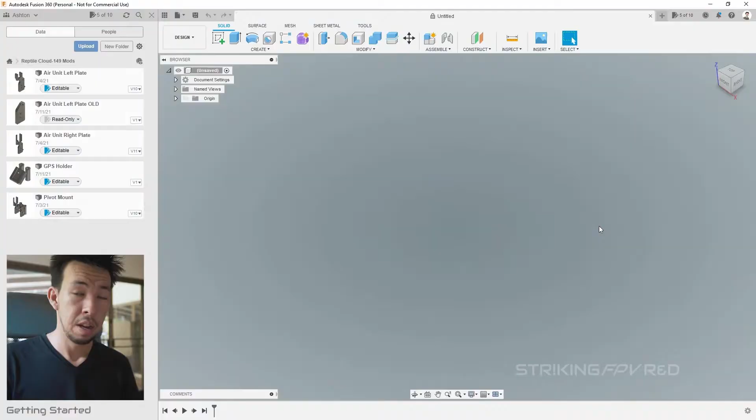All right, so you got to start up Fusion 360 first. Fusion 360 is free, and I'm not teaching you how to install it because it's pretty self-explanatory. But you do have to sign up, click a couple of boxes, and once you're ready to go, you'll be presented with this screen.

Untitled document. So first things first, we need to create a sketch by clicking this button on the top left. A sketch is basically a 2D drawing that we're going to use to end up with a 3D object.

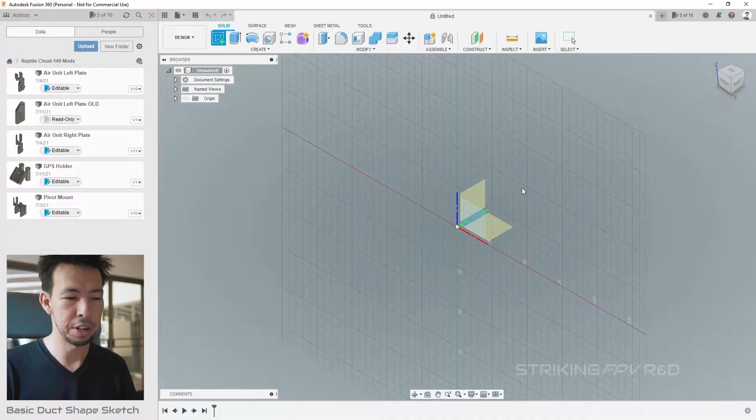First things first, I need to choose a plane, and I'm not going to choose the top-down plane because despite this being a circular shape, and you're thinking maybe I want to draw a circular shape like that, we're not going to do that. We're actually going to draw the cross-section of the shape. So we're going to select this side plane, could be the other side plane, as long as it's not the top-down one. And we're presented with this grid.

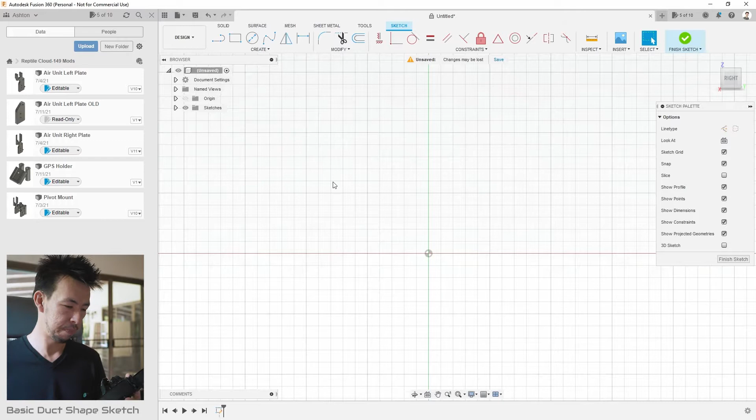So first things first, how big do I want the duct to be? What I'll do is take the original Cloud-149 drone, 149 HD in this case, and using a pair of calipers, we're going to measure the diameter. And that is almost exactly 80 millimeters across.

But I know that's a little bit too much. If you look, there's a little bit of extra gap around the props, and if you want really good efficiency, you want that gap to be smaller. So if I quickly measure that gap, just eyeballing it, it is actually about 3 millimeters.

Spoiler alert, I've actually done this before. I've made a duct before, and the amount that I actually quite enjoyed using was 78 millimeters for these props. You could go smaller if you had slightly smaller props, but that's completely up to you and part of the prototyping process. So if 78 millimeters is the diameter, I actually need to work with the radius, which is going to be 39 millimeters.

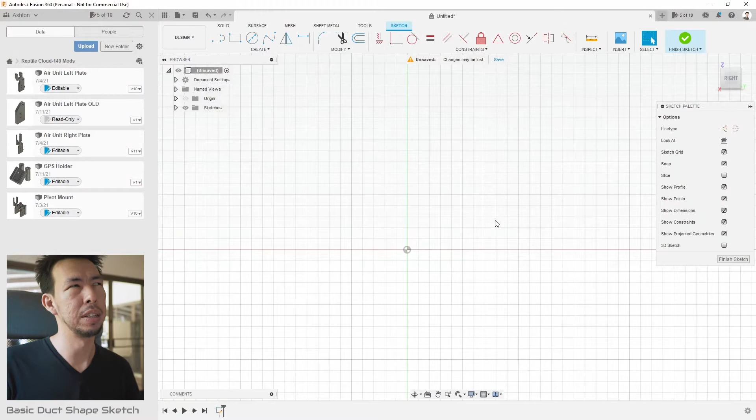So click on here, this is the line tool. It's how you draw lines. You'll notice a pop-up appears. All of the tools up here have a little pop-up which explains roughly what they do. Very handy. Once we click that, I'm going to click on the center of our sketch.

You'll notice if I move my mouse around, it's showing a preview of the line, including two things I can fill in. The first text box will define the length of the line, and if I press tab, I can also select the angle the line is from the horizontal plane. In my case, I want to set the length, so I'm going to move the mouse here where it locks to a horizontal plane, type 39, press enter, and now I have the line at exactly 39 millimeters long from the origin.

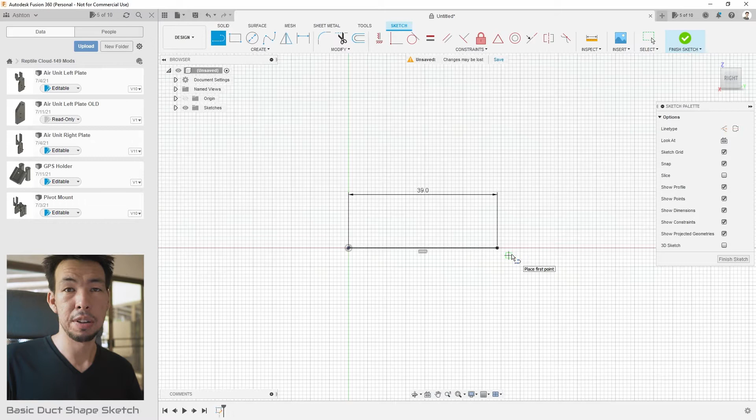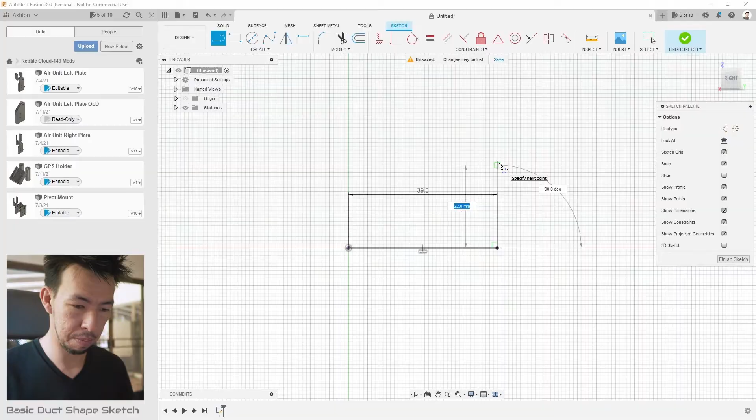From that point, I'm then going to draw the rough cross-section of the duct that we want to create. So I'm going to click here, move the mouse up, and now I need to know how tall the duct is. To save time, this is another duct that I made. I'm going to measure roughly with this, almost exactly 30 millimeters. So we're going to type in 30, press enter, there we go.

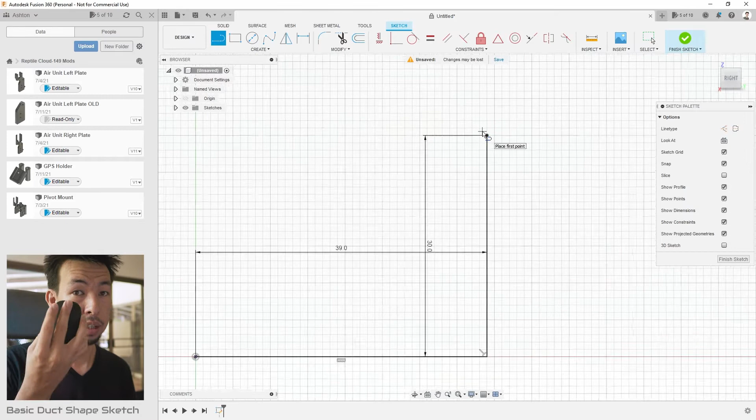Now in terms of thickness, the original duct is just shy of 2 millimeters thick. I've actually made mine also 2 millimeters thick, so we're going to type in 2 when we create this section here. I'm going to zoom in a bit, use the scroll wheel on the mouse to zoom, click on that point, draw across, and just type in 2. Then we're going to complete the shape by drawing down. You'll notice it's still doing the line thing, so I'm going to click across. And there we go.

We're pretty much done. Now the other thing is we have the original line that we used to set the initial distance. I'm going to just click on that and press delete, and now we're left with our main cross section. So just to demonstrate, we click Finish Sketch. I can then use the View Cube to go back to a kind of 3D view.

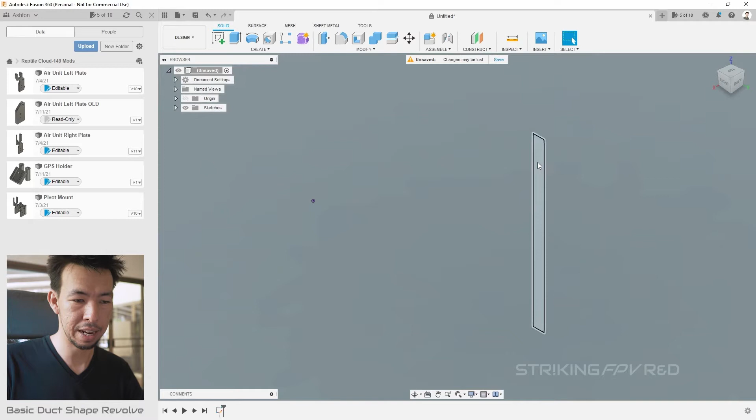I like to use this top kind of oblique angle. Zoom out a bit, and with this sketch selected, like so, I then click on Revolve. What Revolve is going to do is sweep around and create the cross-section around an axis, which I now need to select. In this case, the vertical one, the blue one. So we click, and boom.

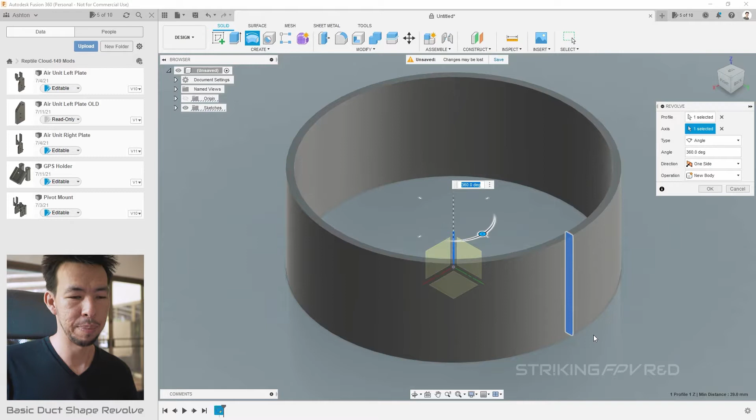Now you see how this tool happens to work. It's created - I'm going to click OK - it's created a revolution of our cross-section and generated this, what actually looks a bit like a brass sleeve. But this is not really a duct shape.

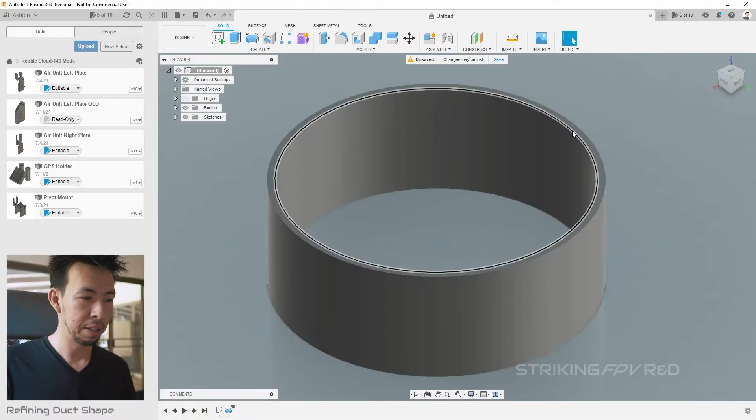So what we're going to do is go back into the original sketch and modify it. That's the brilliant thing about parametric design and software like this - you can go to a previous step, change it, and alter the outcome of the final piece. So to do that, we go to this little timeline on the bottom, and I double click on the sketch, and it brings me back to the sketch.

So what we need to do is now create a rough duct kind of shape. Now, with the knowledge that I plan to print this upside down, you'll know if you have any experience in 3D printing that 45-degree angles are roughly the limit you want for overhangs when it prints off the bed. So I'm going to use that as a guide for creating this particular duct.

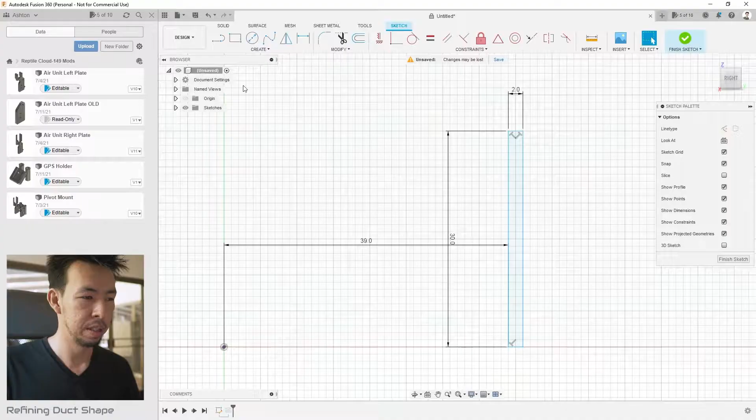So let's use the line tool, and I'm going to zoom in over here, click on the top right edge - it's not locking, which is a bit annoying. There we go, now it is. And there we go, so that's the first kind of edge. Now I want to have a lip, so I'm going to click there. Again, let's type in 2, so 2 millimeters out, and then we'll have the rest of the lip also kind of 45-degree thing going on. Click, and then back to the main part.

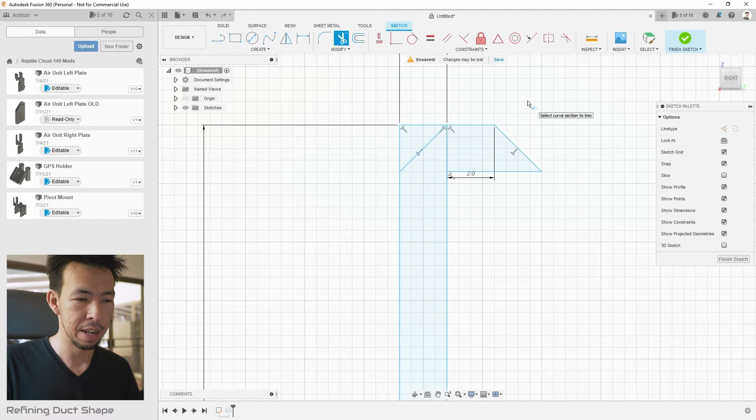Now here's the weird thing. I have this long line here where I don't want this section, and I have this long line here where I don't want that section, nor this one. There's a handy tool for that, called the trim tool up over here - it looks like a pair of scissors. With this tool, it will know where any lines have intersected and give you the option of trimming those lines. So by clicking on these areas, I get to remove those lines.

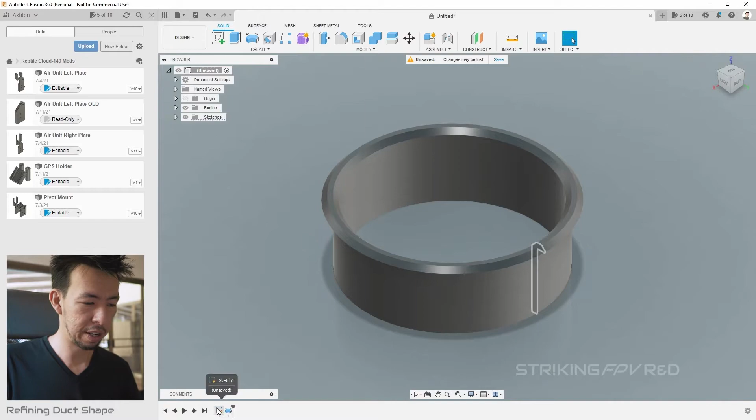If I click Finish Sketch, now our duct - let's go look at a 3D view - looks a lot more like a duct. To further refine this, I'm going to go back in, and there's another thing we can do.

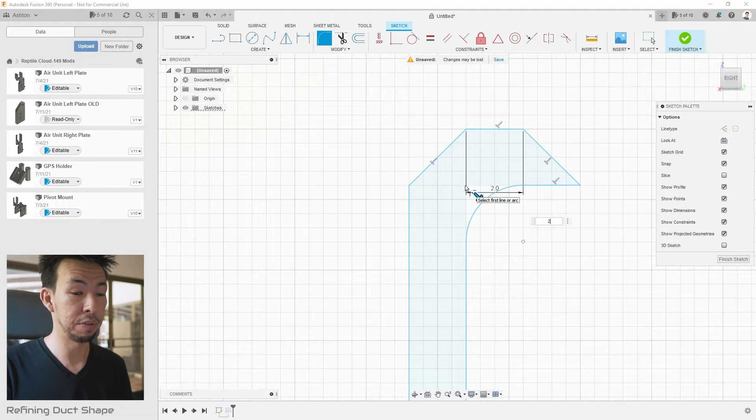So I don't really like this sharp edge over here, but knowing what I know about overhangs, I can actually make this smoother. Using this tool here, the Fillet tool, I can click on that corner, leave it at 1, or I could make it much larger, make it 2. Maybe that's better for strength, so let's do that, 2. And now we've made this nice and smooth curve.

And again, with the overhangs, I can't really do that with this corner because that's going to cause issues with the print, nor with this one, but I can do it with this. So I'm going to click that, and it's automatically selected 0.5. I wanted a bit more than that - let's try 5. Oh, maybe too much. Or maybe too little - 2.5 then. Actually, now let's just go with 2. Press OK, or press Enter, sorry.

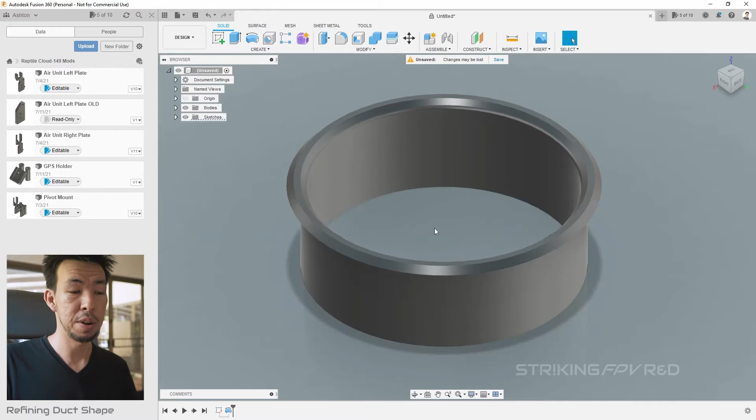And now our duct has an even smoother shape. Once we click Finish Sketch, now it's looking even more like a vaguely aerodynamic duct kind of shape. So there we go, that's our basic duct design.

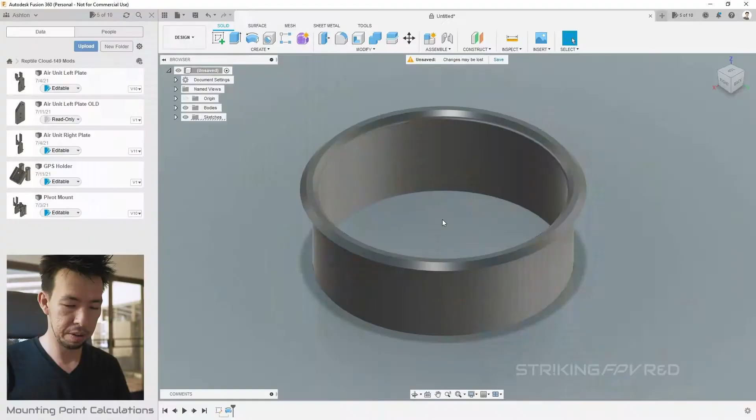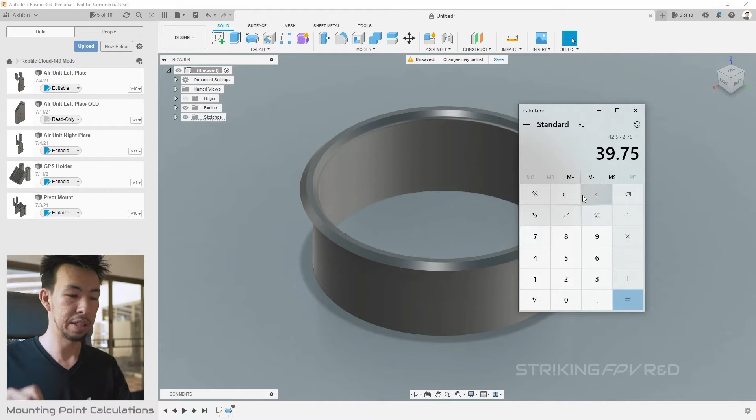43.5, let's go to our calculator. We need to remove the radii of the other holes we just measured. So 43.5 minus, the small one was 2 millimeters diameter, which means minus 1 millimeter. And the larger one was 5.5, and half of that is 2.75, so minus 2.75. That gives 39.75. So now we know that the center to center distance between the motor hole and the outside mounting hole is 39.75. With this, we'll now be able to create the mounting points in Fusion 360.

Back in Fusion 360, what I'm going to do is click over here. There's a little eye next to the bodies folder. Bodies are the objects that we end up creating, and I don't need to see this at the moment, so I'm going to click on the eye and hide it. Now if I click off, you'll notice it's completely disappeared.

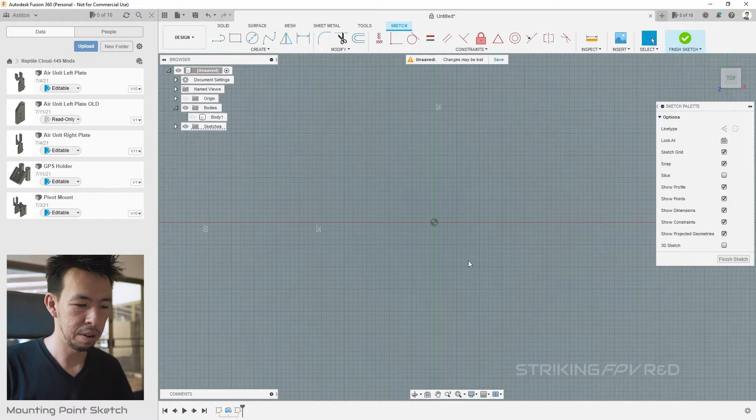Then we're going to create a new sketch, and this time we'll be creating the sketch on the ground plane, the flat plane. So here we are again, but this time we're looking top down. So what did I say earlier? 39.75. A couple ways we can approach this. I could just create a circle to begin with, and it's asking me for a diameter.

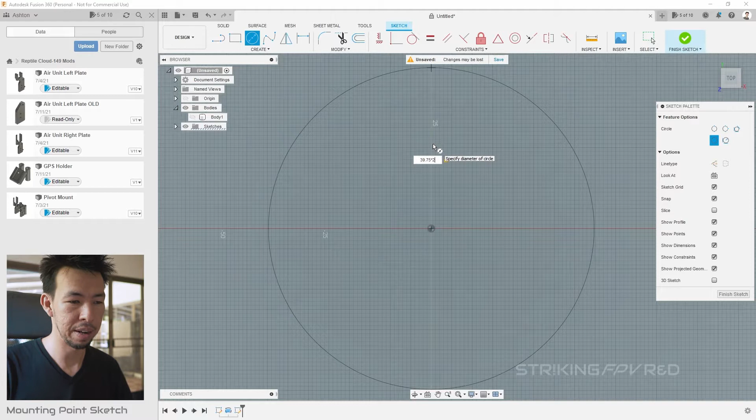39.75 is the radius, but I need diameter, so simply multiply by 2. I can type multiplied by 2, that's the asterisk on the numpad, and it will do that calculation for me. You can do this in Fusion 360 — type a small formula into a length or angle text box, and it will calculate it for you so you don't have to think too much. So 79.5 is the diameter.

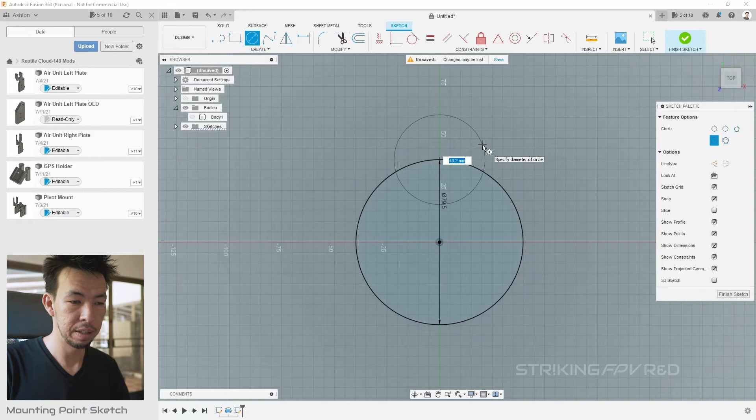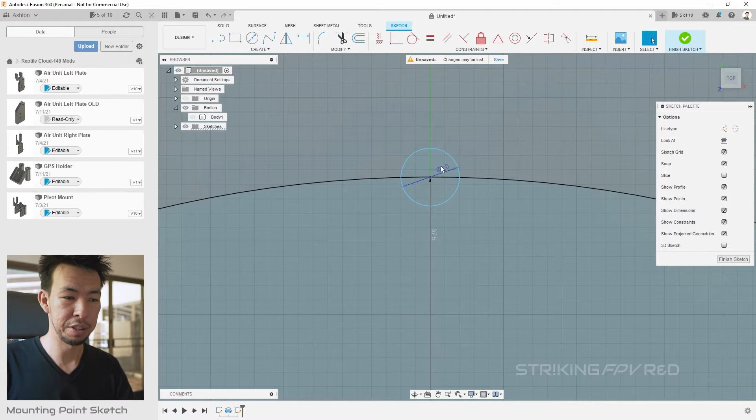Now we're going to place our top mounting hole. All you have to do is move the mouse up there, and it should snap. I can freehand set the size of it, or type in 2, because that's the diameter of the mounting hole. Except I need the screw to bite into the plastic, since I don't have brass standoffs, so I need this to be a little smaller so the screw can bite into it. Now that we have a dimension shown here, this little 2, I can double click it and modify the dimension afterwards. So we're going to set it to 1.7, which makes it just a little bit smaller, and should give enough meat for the screw to bite into and hold the part.

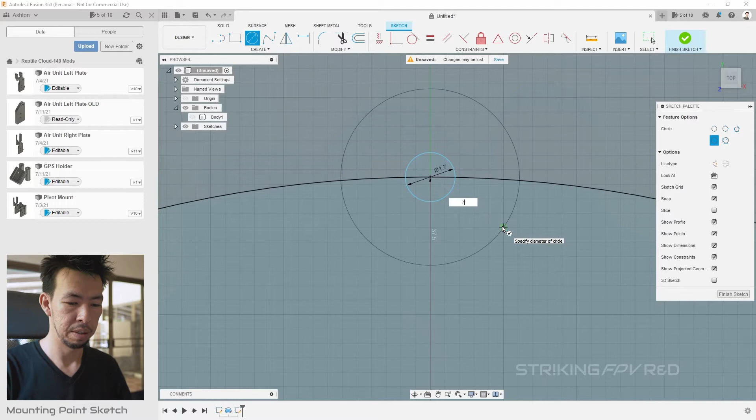Now the second aspect is, what about the outside? Using the calipers, I'll measure the approximate thickness of the arm itself, which is 7, and I think that's probably going to be an appropriate size for the standoff. So I'm going to click on the circle tool again, click on the center of that, and just type 7. And there we have our standoff. But that's only the single one.

What about the other side? Well, we'll work this out. When I say clever assumptions earlier, I mean we can fairly assume that whoever designed this duct has made these equal. They're basically symmetrical along this line, so it's going to be a certain distance one way, and the same distance the other way.

So all I need to do is measure the center-to-center distance between these two holes. Now these two holes are the same size, also 2 millimeter. So the measurement is 17 minus the 2 radii of the holes, which is -2, meaning the center-to-center distance is 15.

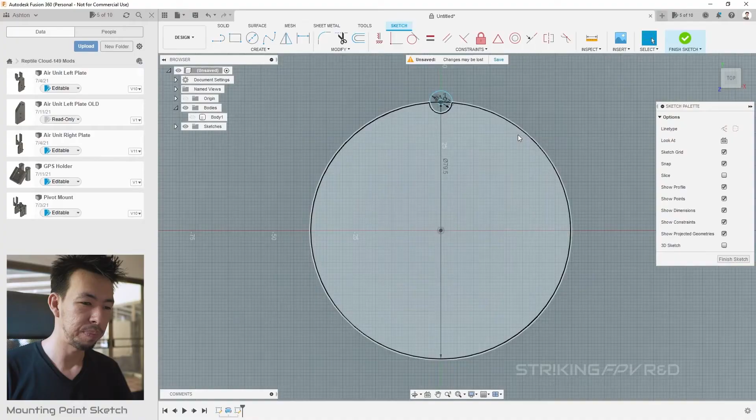With that knowledge, I'm going to create this anywhere. You'll notice that when I'm about to create a circle or draw a line, the snap function allows me to follow the exact circumference of this circle, so I'm not going to be particularly careful about how I do this.

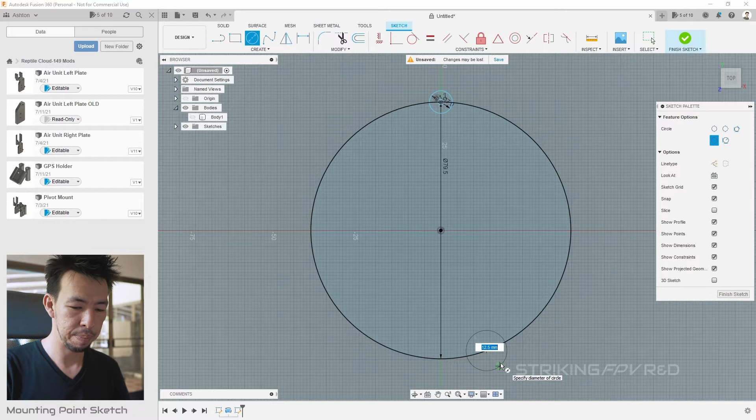I'm just going to choose somewhere roughly, type in 1.7 for the actual bolt hole, screw hole, and drawing again I'm going to type in 7, and we're going to do the exact same thing on the opposite side. Just to prove a point, I'm going to draw that way out of place, 1.7, and make one more that is 7.

Now we're going to use the dimension tool to actually set where they're going to be. This allows us to add dimensions, lengths and distances between objects in order to constrain them in that kind of way.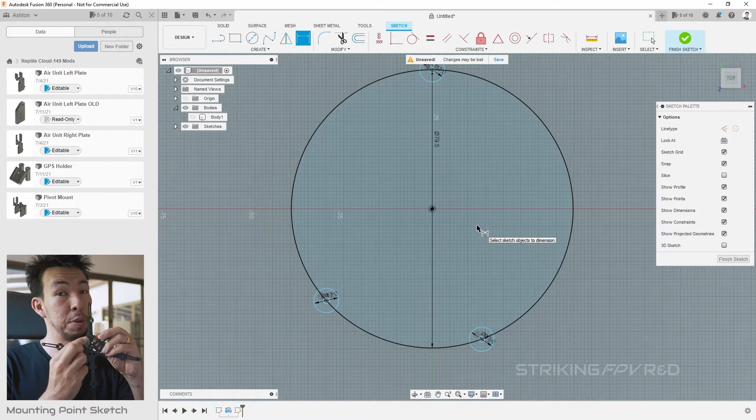For example, I now know that these two holes are supposed to be 15 millimeters apart, center to center. So what I'm going to do is click on one of them and then click on the other, and it's going to bring up this little weird behaving ruler thing.

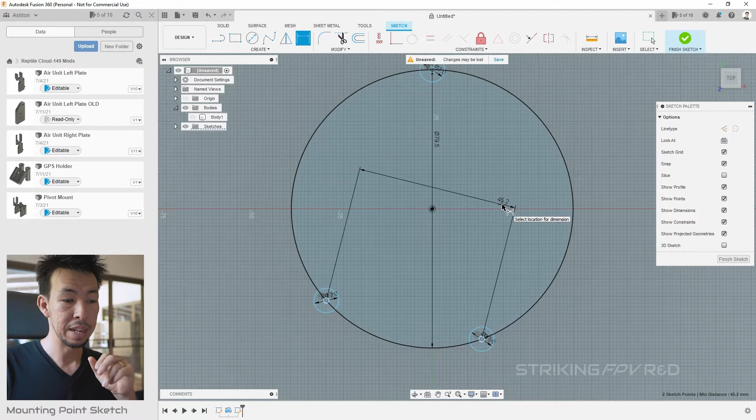If I set it like this, it's going to make sure they're 15 millimeters apart horizontally. If I set it like this, it's going to be straight line distance, the shortest distance. And if I set it like this, it's going to be vertically. In my case it doesn't matter too much, but I'll demonstrate and set this to direct straight line distance, type in 15, and they suddenly pull themselves together, but they're both still on the circumference of our circle.

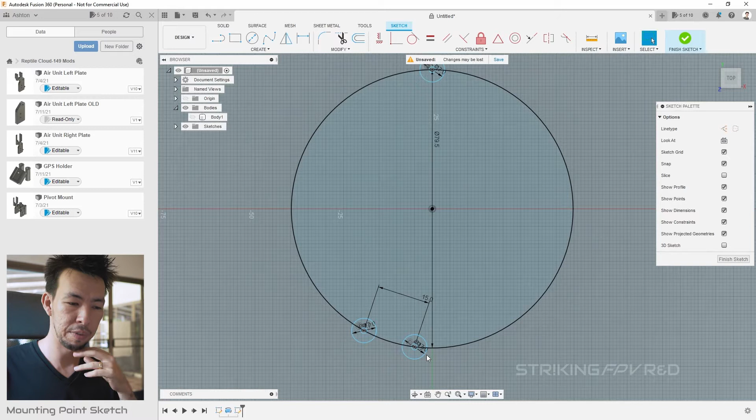In fact, if I drag one of them, you'll notice that they're both staying on the circle and staying 15 millimeters apart, which is really cool. But how do I get them centered?

Even simpler. All I have to do is click dimension, select one, and then select the center of the sketch, because that's the middle. Once again, if I move it here it's the straight line distance, but if I move it up there I set the horizontal distance, and here I can set it to 7.5. And that sets the correct position.

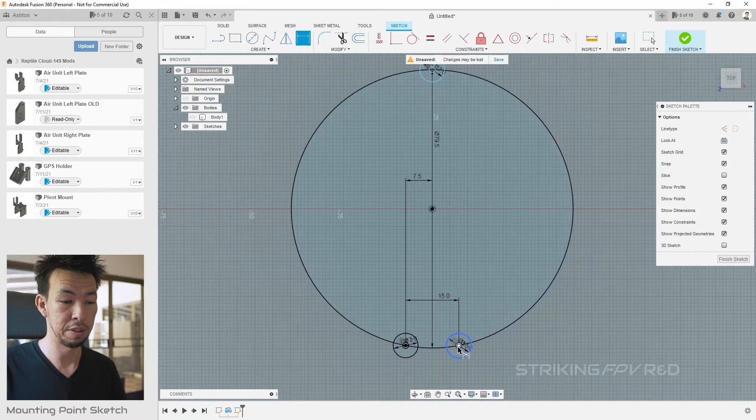Or we can undo that, and just to demonstrate one more time, I click here, click there again, and unless my mathematics is really bad, 15 divided by 2 is also 7.5. Now they're both the correct distance and the correct position.

Anyway, there you have it. So now the only thing left to do is to get rid of the main circle, just by clicking and deleting it. Now we're left with our standoff. So let's finish the sketch, and we're left with the standoffs here.

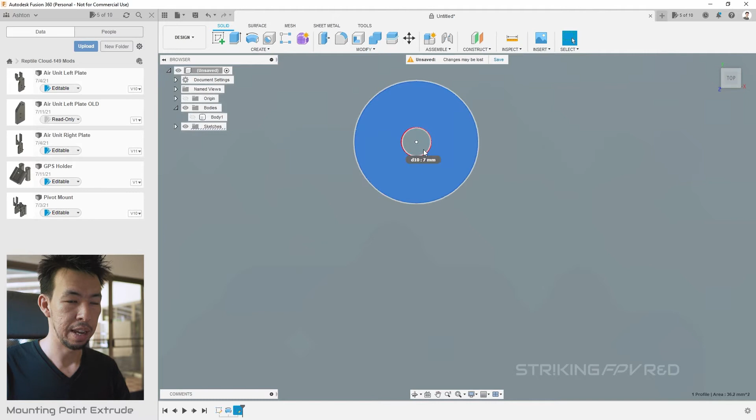Before we actually introduce the main body back, I'm going to use this opportunity to select both the inside and the outside, and there's a reason why I'm doing this - I'll show you this later. Sometimes it's a bit finicky to select them, for some reason I'm not sure. If you know the reason, because you're a professional Fusion 360 user, please let me know.

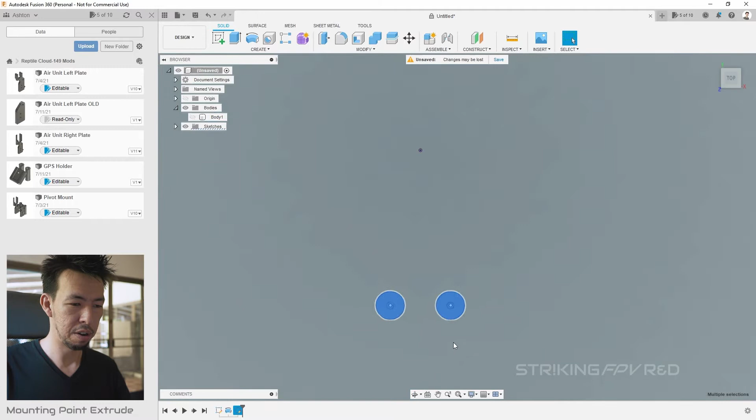Once you've got all of them selected, we can go to one of our fancy oblique views here. Before we do anything, I'm going to unhide the main body, like so, which shows this, and we're going to press Extrude. This is where the magic happens, because Extrude is a function used probably a lot more commonly than Revolve, at least in my experience.

What we can do is drag the arrow up, and oh, it's done a red thing. If I drag it down, it's creating.

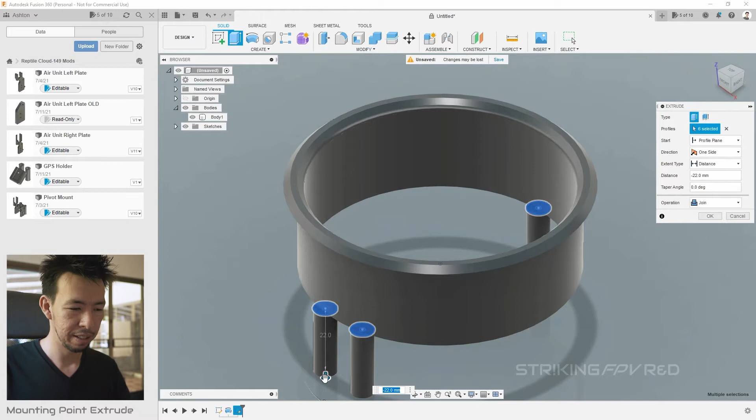If I drag it up, it's deleting, which is not the behavior we want. But that's easily changed, because in this little extrude window on the side, there's an operation drop-down box, currently set to cut, and it automatically changes. If I drag it down, it says join. I drag it up, it says cut. But if I select it, I can set it myself to join.

Now we've got roughly the design we want. Only thing left to do is decide the height, and the way we can do that is either measure one that I did earlier and find out that it's 10 - it's quite tall. What about the original? If I use this, I can measure the original design's height, and their standoffs are 8. I kind of like that, so let's go with 8.

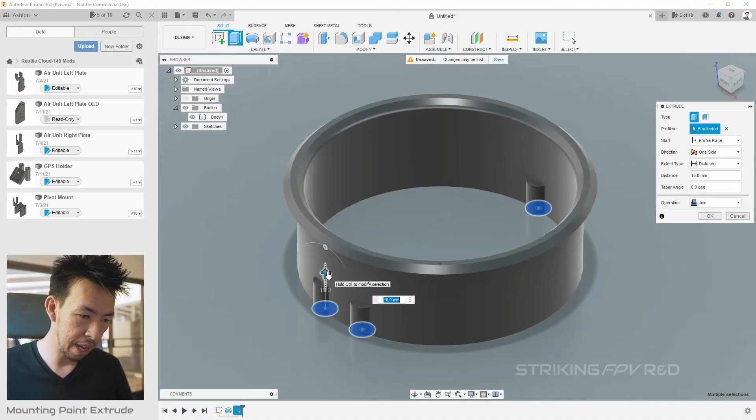I'm going to type 8 in this box there. That sets it to 8. Press enter, and now we've got our standoffs.

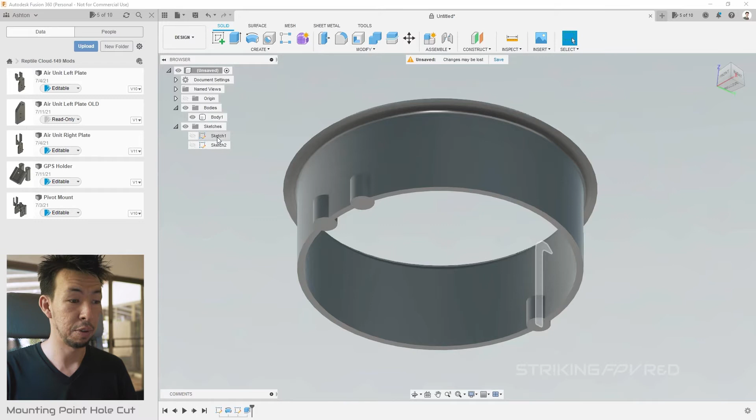The only thing left to do is make the actual holes. So let's go down to this view. Now you'll notice that the sketch we had earlier with the holes is now gone. But it's not, because if you go to the sketches folder here, we have sketch 1 and sketch 2. If we mouse over them, it'll show you what they look like. I'm going to click the now faint eyeball, and that's going to reveal it again.

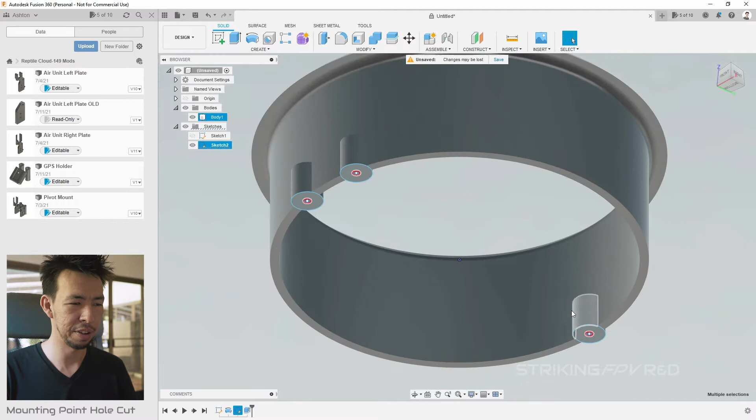Now I'll be able to zoom in, select that hole, select it over there as well. You hold shift, by the way, to select multiple things, if I didn't mention that earlier. Then you press extrude, and it's remembered the last time we did an extrusion at a distance of 8, but it's also setting it to cut again, which is fine.

Now, how deep do we want these holes? The screw itself is not very big, actually. Using the calipers to roughly eyeball it, it's just shy of 6 millimeters. The base plate that it's going through is 3, so the screw is only going to go up into the plastic by about 3 millimeters. But just to be safe, because 3D printers tend to over-extrude a little if you want better adhesion, we're going to set that hole depth to 4.

Click OK. I can now hide the sketch that we just unhid, and we've got our holes. Now, for all intents and purposes, this is our finished duct.

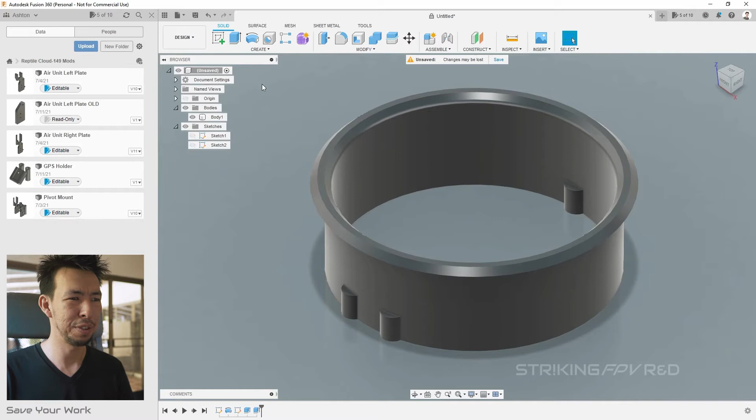So while we're here, Control S, Command S if they have Fusion 360 on Macs, I'm not sure, or click the floppy disk and choose a location. I already have quite a few folders available. I'm going to put this in the Cloud-149 mods folder and name it Full Duct. Press Save, and now we have Full Duct version 1.

So now this is kind of our finished duct. I could just right click, Save as Mesh, select STL, click OK, and have the final design ready.

But we're not actually done. There are a couple other things I want to consider. Have you ever noticed that on these drone frames, these carbon fiber sheet frames, there are no sharp edges? They're all smooth, either circles or filleted shapes. That's because sharp corners, sharp points, are usually points that focus stress and are more likely to break than if you had something smooth.

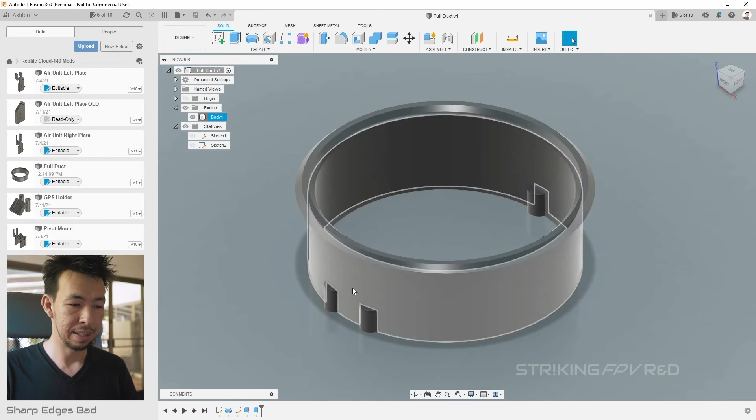Same thing with plastic. And what I'm noticing on this is that we've actually got a couple sharp points here related to the standoffs. I'd like to smooth these, so I'm going to zoom in here and select these sharp edges. Using our view cube to move around, we're going to select all of them.

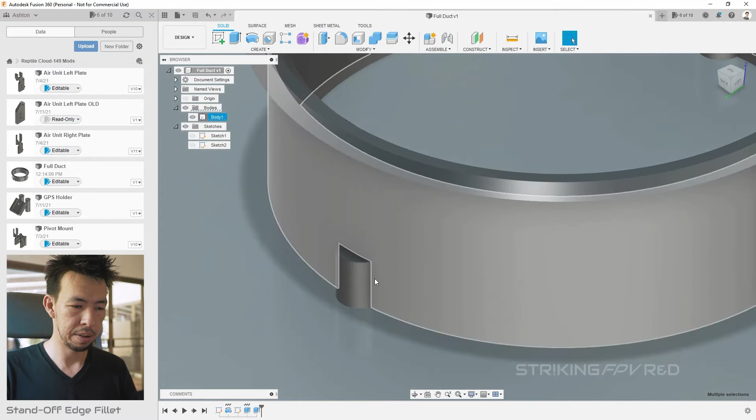On the other side as well, here we go, click, click, clickety, click, click. With all of them selected, now we can use the fillet tool, which is pretty much the same as the one when you're sketching. Once I click this, I get to pull this out and set it. If I pull it out too far, it throws an error, but if I keep it relatively small, it's fine. We can type in the exact amount we want - in this case, 3 looks smooth enough, so I'm going to click OK.

And we'll do the exact same thing to the ones on the inside. Let's go around here. Remember, hold Shift to select multiple. Almost done.

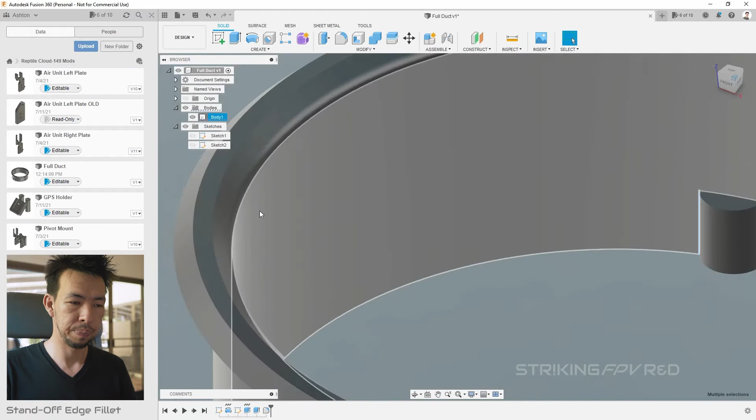Once again, press fillet, and 3 seemed like a nice number from earlier. This one maybe could even do 4. Yeah, let's do 4. Click OK, and now it's smooth. But there's still something not quite right.

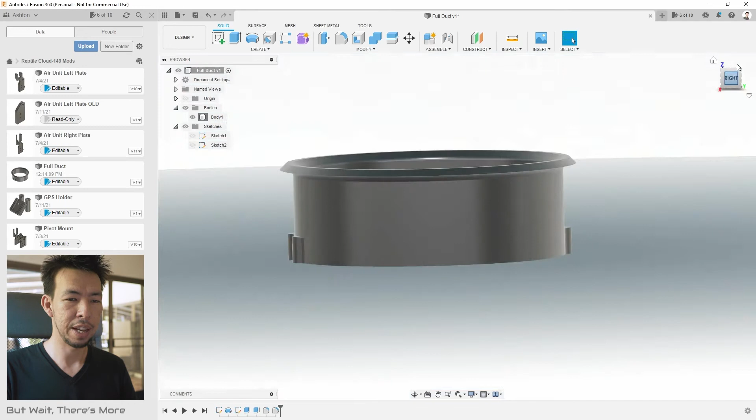The top edge is obviously a sharp edge. Not only that, but with the knowledge that I plan to print this upside down for the purposes of 3D printing, these become overhangs, and 3D printers are famously bad at printing in midair.

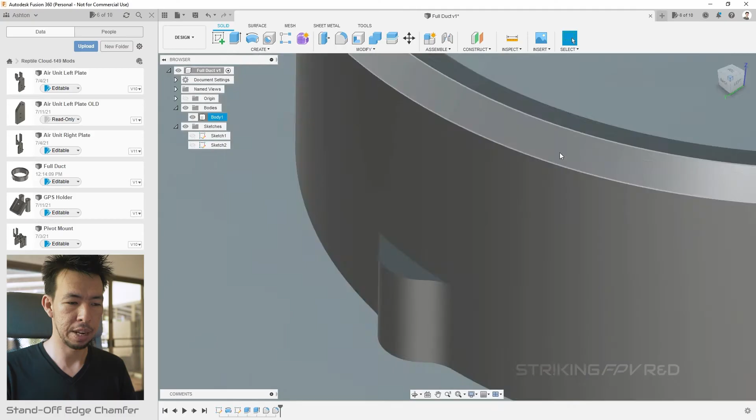So what we're going to do here is select this edge, zoom out, rotate around, hold shift to select the other 2 of the outside, and now we're going to use not fillet, because fillet will lessen but still have an overhang. We'll click on this dropdown on the modify menu, which gives us more functions not normally up there, including chamfer.

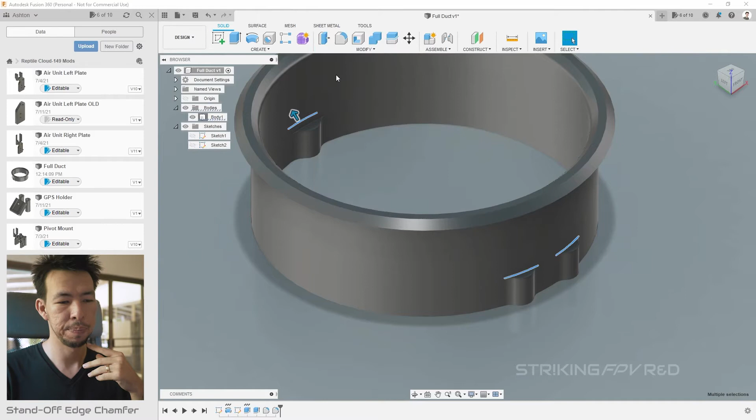At this point I could just drag it out again, but I'm not going to do that. I'm just going to type in the number that I think makes sense. So let's start with 2. Hey, almost, but you'll notice there's still this kind of edge there. So let's see what happens if I put in 3. Oh, you get an error again.

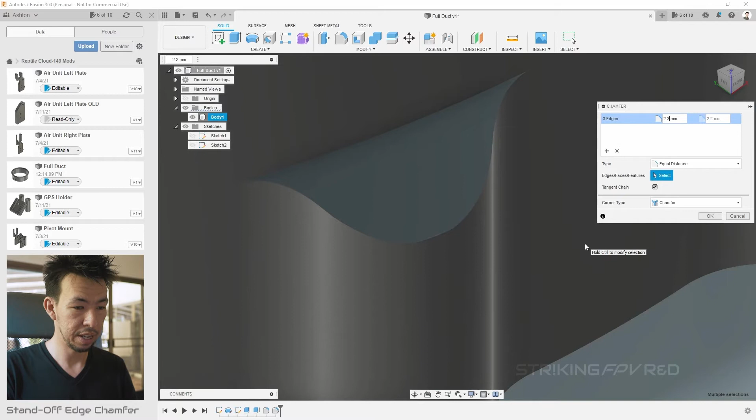This is something you've got to think about when using chamfer or fillet or other tools - there are limits to how far it can do something before it throws an error. So obviously 3 is too much. Let's go back to 2. I only need a little bit more, so I'm going to try 2.2. Oh, 2.3, fail. So what about 2.25? Nope. 2.249 works, and you can still see there's probably a little bit of a flat lip there.

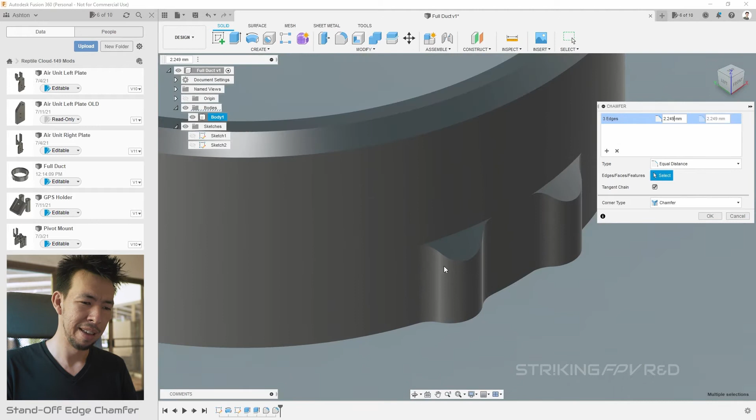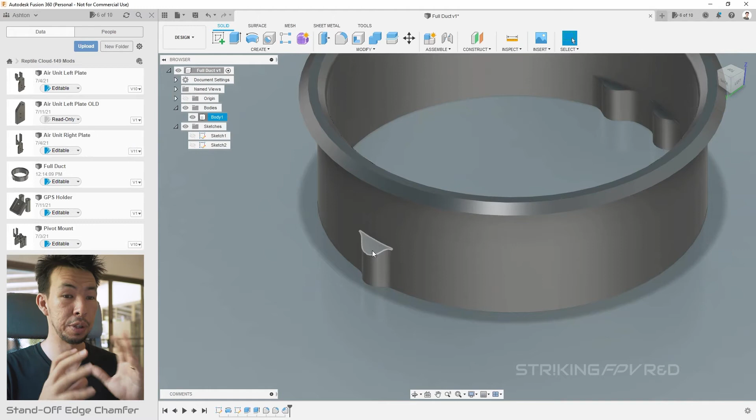But it's so small you pretty much can't tell, and the 3D printer won't have to deal with it anyway, because for all intents and purposes that's a nice 45-degree angle up. So I'm going to click OK. If we go to our left view, you can now see we have this nice 45-degree angle going into the duct. That actually helps make it a strong, solid, smooth piece without any focused stress points, and it's gonna be able to print.

So all we've got to do is the same thing for the inside edges here. Hold shift to select multiple, spin around to get to that side, click modify, click chamfer, and once again let's try 2. 2 is pretty good. Try 2.4, 2.5, 2.6, 2.7, 2.8 - too far, so 2.75... 2.74, that works. Click OK, and now we have nice standoffs for our mounting points.

Oh, but there's one more thing. Notice this - on one of my earlier designs, I have a little notch here, a little gap, because where are the motor wires going to go? So actually, if we were to mount this particular design directly on the drone, we would crush the motor wires, or we'd have to make the motor wires go on the bottom side, which is no good.

So what I'm actually going to do is find out how thick the motor wires are by using the calipers in a weird way again, using the bottom. And they are 1.5, which doesn't satisfy me - what if I want to put tape, what if I want to add extra protection? So let's pretend they're about 3 millimeters thick.

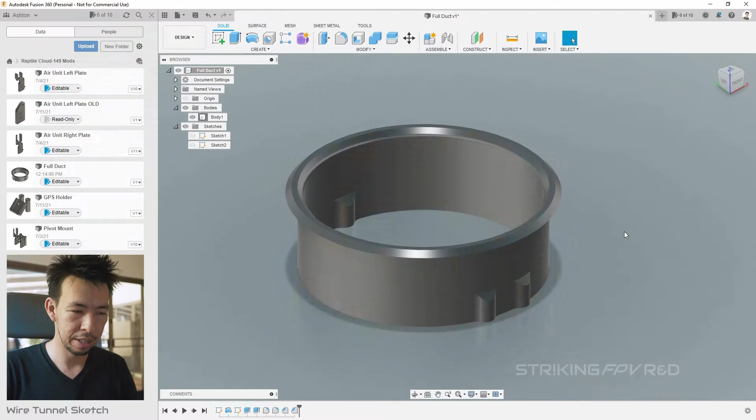Now we need to make ourselves a little tunnel. So how do we do that? Well, it's back to the sketch tool. So I'm going to click sketch, and instead of creating a sketch on any plane, I'm going to create a sketch directly on the bottom of our duct, like so.

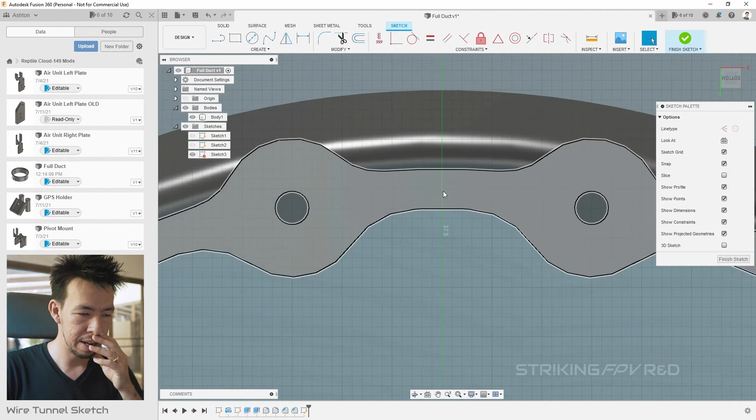Now let's examine this - I need this to be relatively easy. If I click here, you'll notice this is the line design, and this is the point where the fillet was created, which seems like a wide enough thing. Each of the wires is about 1.5, and there's 3 of them, so 3 times 1.5 is 4.5. I just need to make sure that line is approximately 5, and if I draw a line, you'll see it's about 6, so it's long enough.

Press escape to exit that. Click here to check the position again. What I'm going to do now is create a shape that kind of cuts into here.

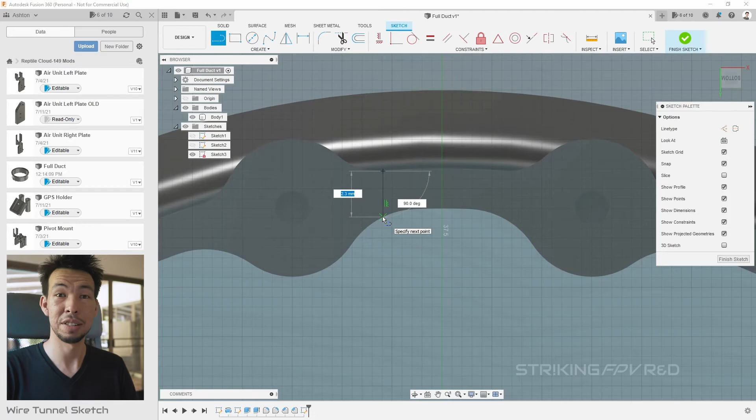The easiest way to do that is to click on the line tool, find the joining point there, and find a matching point on here, except there isn't really a convenient one to choose. I could go straight down, that also works. But if you want it to be perpendicular to the tangent of the circle, that's getting very complex. I just want it to be kind of straight with the curve like that.

I'm actually going to zoom out and just click on the very center of where the motor is. And with the line still drawing, I'm now going to zoom in again and select the exact opposite point. And like that, we're done.

Press escape, and you'll notice I now have a clickable section because it knows the outline of the bottom of the duct, and it knows the lines that I've drawn, such that I don't even need to get rid of these. But to be neat, I'll actually get rid of them. So we click the trim tool and just trim that part of the line, trim this part of the line, and now we are left with just that section.

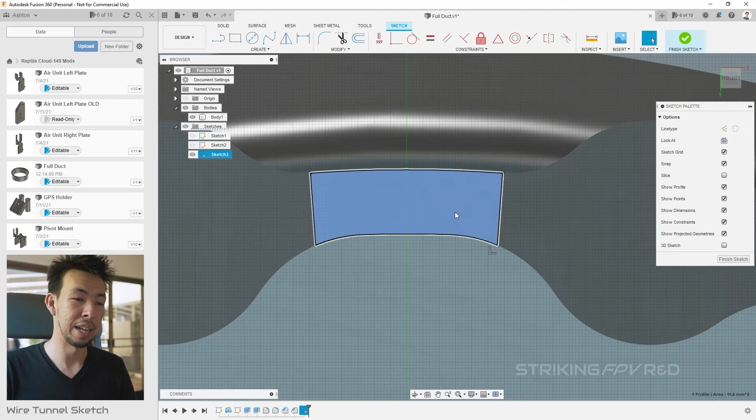Click Finish Sketch, and using our view cube, we'll kind of angle ourselves back out to a position that looks kind of nice. And we're going to click once again, Extrude.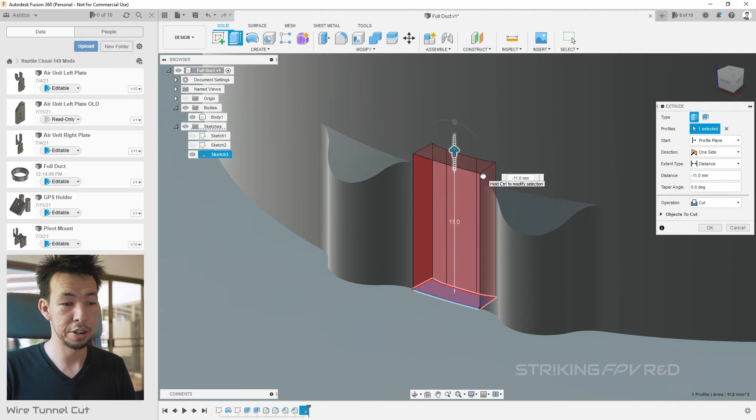Oh, it's extruded the wrong way. But no worries, drag it straight up, and it's extruding the correct way. So I could make this channel really, really big. There's no need for that. I'm going to set it to what I thought before. Let's say -11 was going to be roughly the height of the motor wires. Click OK, and we have a nice channel.

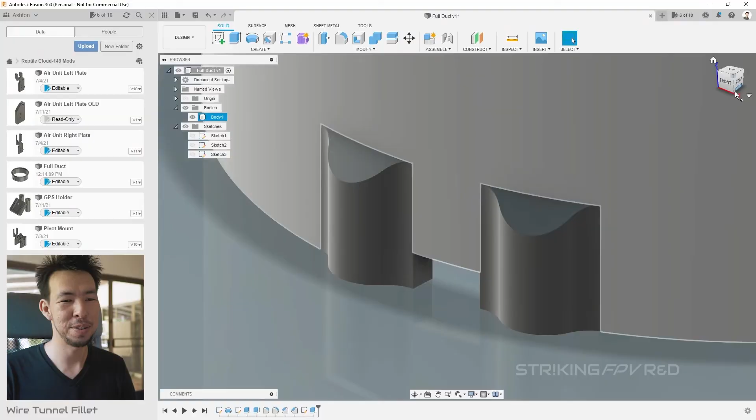Except for one thing. Sharp edges, which I don't like. So once again, angle ourselves, click on the sharp edge we don't want, rotate to the other side, hold shift, select the other one, and once again use the fillet tool.

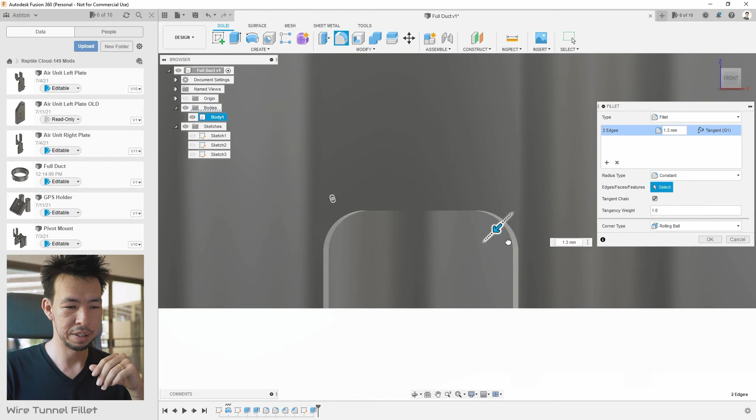And we can drag this out just to get a feeling of what we want. I can look at the front view, see like how much of a mouse hole, kind of Tom and Jerry shaped mouse hole I want. I can even go even further and really close it, but I don't need that much, so let's just set it to 2. Click OK, and like so, we have a nice little channel for our motor wires.

Now at this point, I would say I'm done, so I'm going to save first, Control S, or the floppy disk up there. You'll notice that after it's finished saving, Fusion 360 has now determined that this is version 2 of our duct design. Whenever you make a lot of changes and save a lot, it's gonna keep iterating that number, so I actually have quite a few things open that are like version 14 because of changes that I've made.

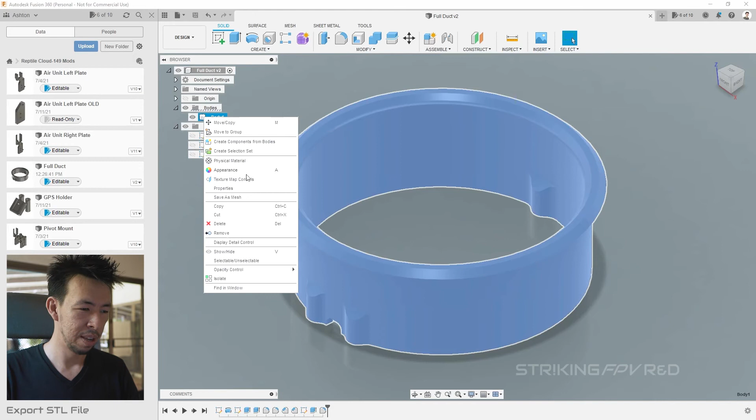Now the only thing left to do at this point is to export the final 3D printing friendly file, the STL file. So, as I briefly mentioned earlier, we're going to right-click on Body 1, Save as Mesh, and it's new to Fusion 360, they didn't have this before. 3MF is a format, I'm not sure what that is, so I'm going to ignore it.

I'm going to set it to STL binary, because that's what's usually been used. Unit type to millimeter, because I've been working in millimeters. And there's a thing here called refinement, which is set to high, medium, low.

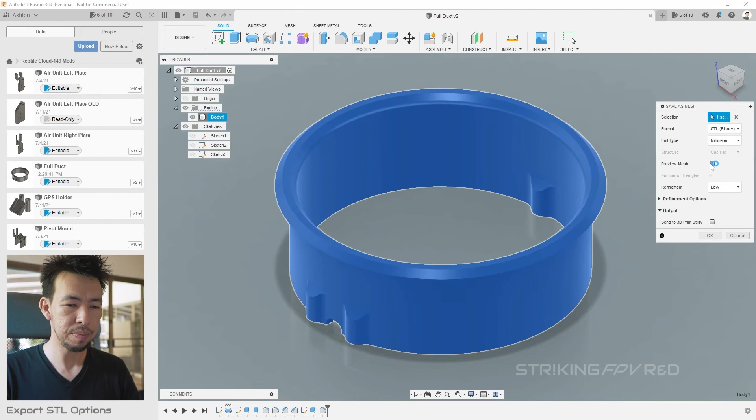That's about the mesh, so to kind of give you an idea how that works, let's set it to low and check this box, Preview Mesh. What that's going to do is show us the wireframe of the model that it's going to pump out, and this is what's going to be interpreted by your slicer program. Now, this is not super high resolution, and you may find that if you print this, you'll get faceted edges around.

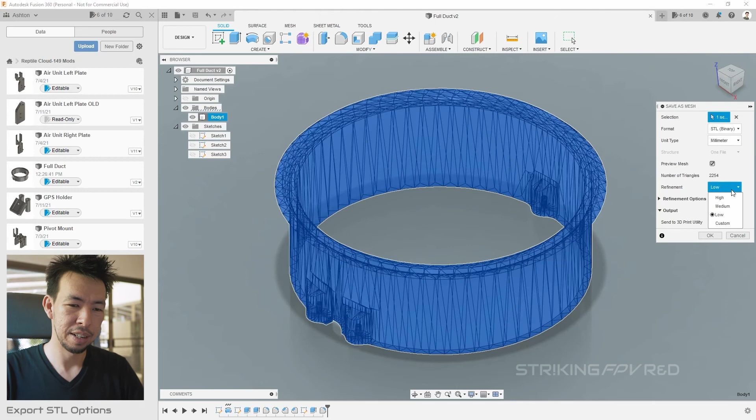So what I'm going to do is select high, and it's going to give you a preview and see how much more dense the wireframe is. In general, this is a good idea, just to have it as high resolution as possible. You can go custom and set it higher, but for this particular model, this is totally fine. Click OK, and it's going to ask you to save it somewhere. I've already got one file here that I actually don't want anymore, so I'm going to call it full duct.

Click Save, click Yes, and we're done. Only thing left to do is drag it into a slicer of some description.

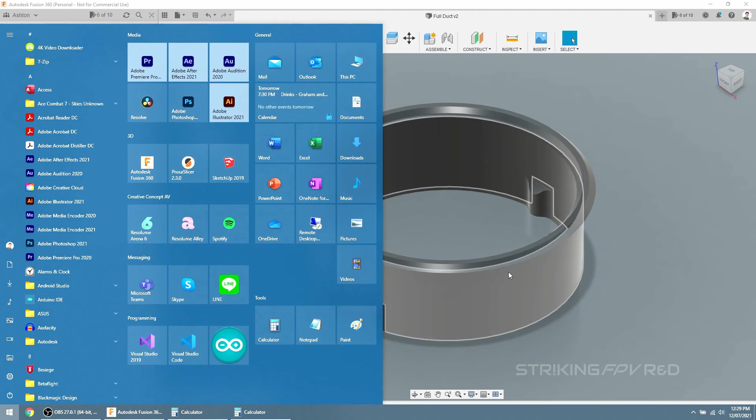So I'm going to do that. PrusaSlicer is my weapon of choice. It's free, and it's better than the original Slic3r because of all the extra handy-dandy little features. Not that the original Slic3r doesn't have all the features, Prusa has just decided to put them in more convenient areas.

So I'm going to click Add, and we're going to select Full Duct. That's going to plonk it in our workspace, and as I mentioned earlier, this needs to print upside down, so using this tool here, the Place on Face, select roughly the top face, and it flips it upside down, then just click Slice Now. Obviously use the settings that work for your printer.

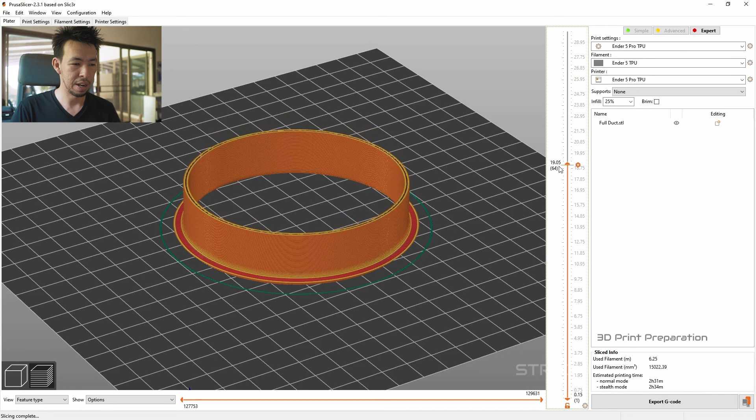I'm not here to teach you about that, but once it's finished slicing, we can preview our design and see how it's going to be built up. If we zoom in like so, you can see roughly how it works, how it starts small because that's the original, first flat surface, and then it expands upwards at a 45-degree angle, which printers can do. You can see the smoothness of the shape build upwards.

At a certain point we'll even see, where are they? There they are. We'll see where our standoffs start to appear. Let's zoom in even more because that's quite satisfying. There we go, our standoffs appear when the hole for the bolt appears, and how it finishes it off.

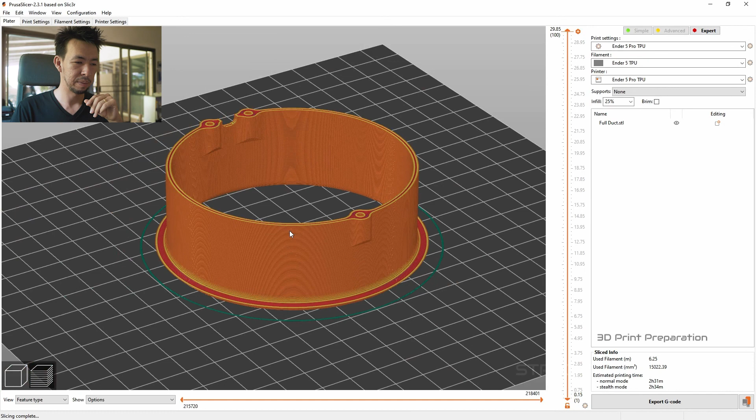That's it. Export your G-code, full plate G-code, click Save, send it to your printer, and hope it works.

Now if you can guess how I did that, then you probably don't need to watch the next video. But if you'd like to see how I made this, please let me know, because I think that would be a nice little next video to do, just to elaborate on duct design in general, as well as for 3D printing, because there are some nuances. If you want to avoid using supports, how do you design it so that it prints in one go and prints really nicely? I've kind of pulled that off. I'm sure other people have too, but the point is I'm showing you. So let me know if you want to see that.